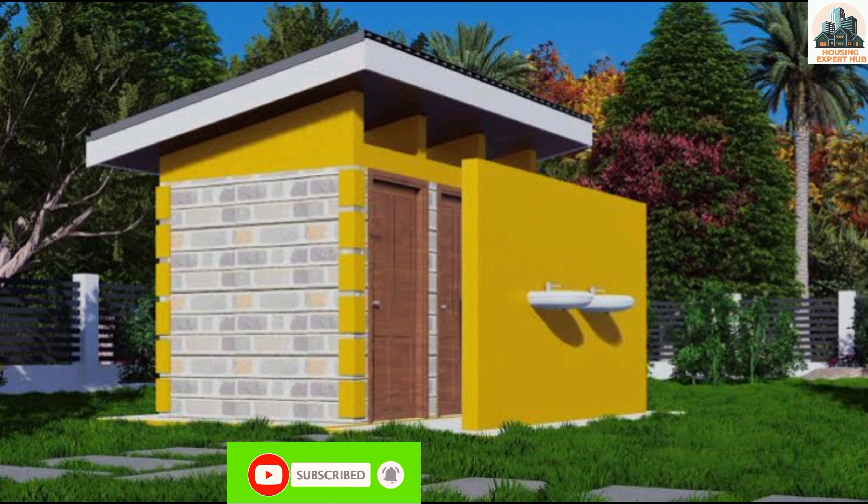Designing a two-pit latrine system and an associated bathroom requires careful planning to ensure hygiene, durability, and user comfort. This is a structured approach to designing such a facility, commonly used in off-grid or low-resource settings. Understanding the two-pit latrine system.

A two-pit latrine, also called a twin-pit latrine, is a low-cost, water-efficient sanitation solution where two alternating pits are used for waste decomposition. One pit is in use while the other undergoes decomposition. After 1 to 2 years, the decomposed waste can be safely removed, and the pits are swapped. Suitable for areas with high water tables, if properly lined, and no sewerage systems.

Key design considerations. A. Pit design dimensions. Each pit should be 1 to 1.5 m deep and 0.8 to 1 m wide, circular or rectangular. Lining: unlined pits for stable soil with low water tables; brick or mortar-lined pits for loose soil or high water tables. Vent pipe: a PVC vent pipe, 10 to 15 cm diameter, helps reduce odors and flies. Cover slab: reinforced concrete with a squat hole, 28 by 18 cm, and a tight-fitting lid.

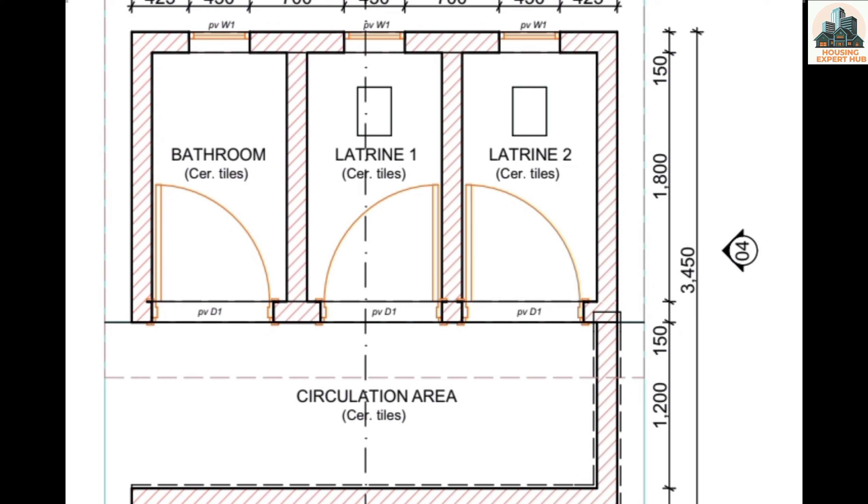Superstructure, bathroom toilet shelter. Materials: brick, concrete, or durable local materials. Size: at least 1.2 m x 1.5 m per toilet cabin. Roofing: corrugated metal, thatch, or concrete. Ventilation: openings near the roof or mesh-covered windows. Door: should open outward for safety and space efficiency. Hand washing station: a simple tap or jug system near the exit encourages hygiene. Use soap or ash for hand cleaning.

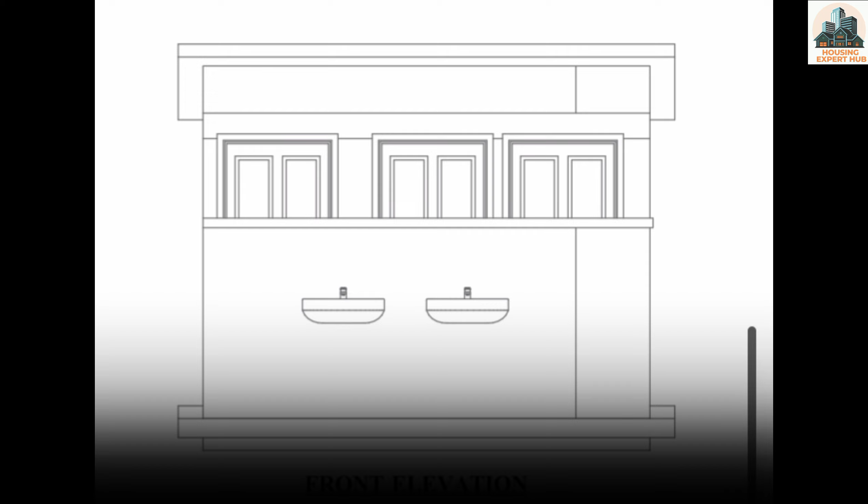Step-by-step construction. Site selection: at least 30 m from water sources, wells, rivers, on elevated ground to avoid flooding. Digging the pits: space pits 1 m apart to prevent collapse. Line with bricks or concrete if needed. Installing the cover slab: use reinforced concrete, 5 to 8 cm thick. Building the superstructure: provide privacy walls and a secure door. Include a vent pipe extending above the roof. Adding a hand washing facility: a simple bucket with a tap or a tippy tap.

Maintenance and safety. Alternate pits every 12 to 24 months. Remove decomposed waste safely; use gloves, compost if possible. Keep the area dry and clean to prevent flies. Educate users on proper use: no solid waste other than feces. Advantages of a two-pit latrine: low water usage, no flushing required. Cost-effective compared to septic tanks. Safe waste decomposition, pathogens die over time. Scalable for households or communal use.

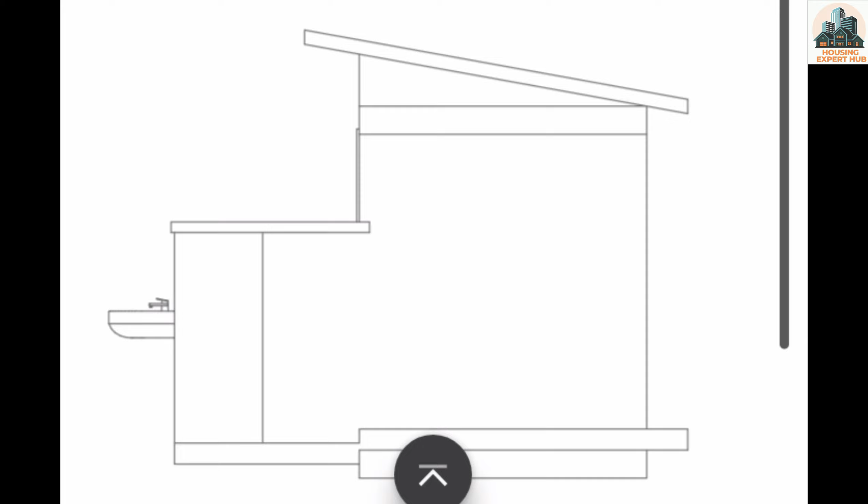Variations and upgrades. Pour flush latrine: uses a small amount of water to move waste into the pit. Ecosan, ecological sanitation: diverts urine for fertilizer use. VIP, ventilated improved pit: enhanced odor and fly control. Final recommendation for a functional and hygienic two-pit latrine bathroom: use durable materials for long-term use. Ensure proper ventilation to reduce smells. Train users on pit rotation and maintenance.

Building two-pit latrines with a bathroom requires careful planning to ensure hygiene, durability, and user comfort. 1. Site selection and preparation. Choose a location at least 30 meters away from water sources to prevent contamination. Ensure the ground is stable, well drained, and downhill from living areas. Maintain a safe distance, at least 6 m, from other structures.

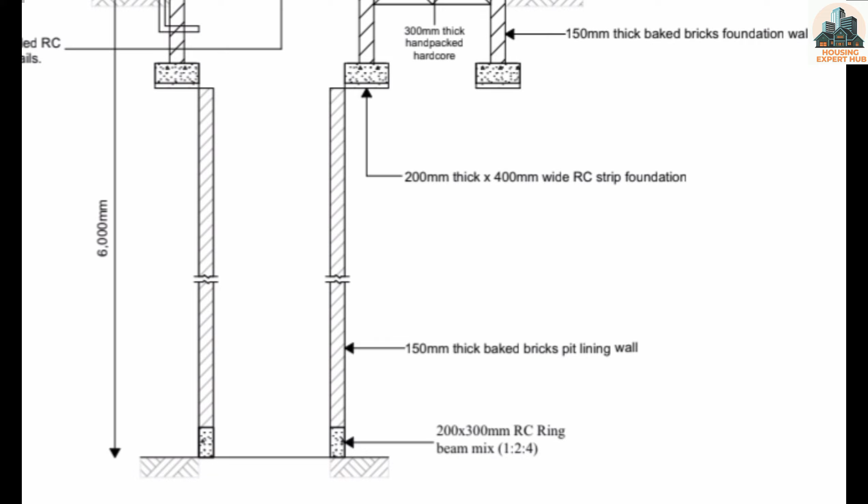Design and dimensions. Structure layout: two-pit latrines plus one bathroom can be a shared design or separate stalls. Recommended dimensions per unit: latrine stall 1.2 m x 1.2 m minimum. Bathroom stall 1.2 m x 1.5 m for bathing space. Total structure size 3 m x 2 m; adjust based on needs. Pit design for each latrine: depth 2 to 3 meters, depends on water table. Diameter 1 to 1.5 m. Circular or rectangular. Lining: brick, concrete rings, or stabilized soil to prevent collapse. Distance between pits at least 1 m apart to avoid structural weakening.

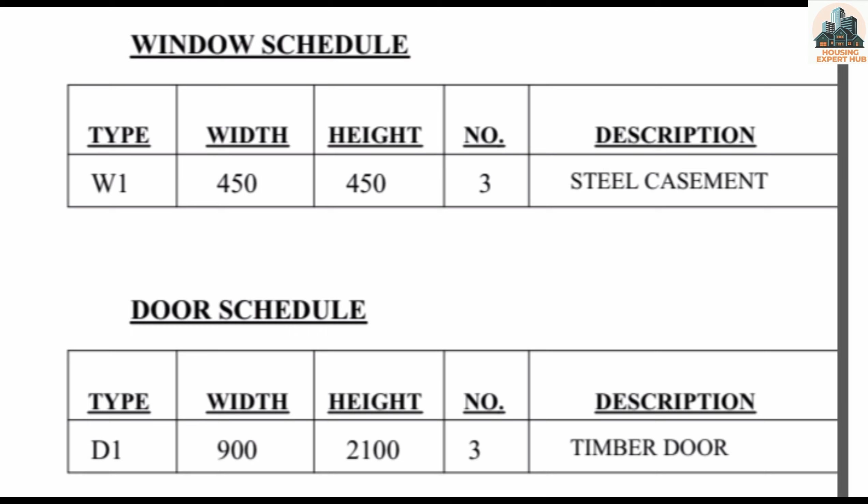Materials needed. Foundation: concrete, gravel, sand. Walls: bricks, blocks, wood, or metal sheets. Roof: corrugated iron, thatch, or concrete slab. Slab floor: reinforced concrete, with footrests for latrine. Pit lining: bricks, concrete rings, or mortar. Door: wooden or metal with ventilation gaps. Vent pipe: PVC pipe, 100 to 150 mm diameter, for odor control. 4. Construction steps.

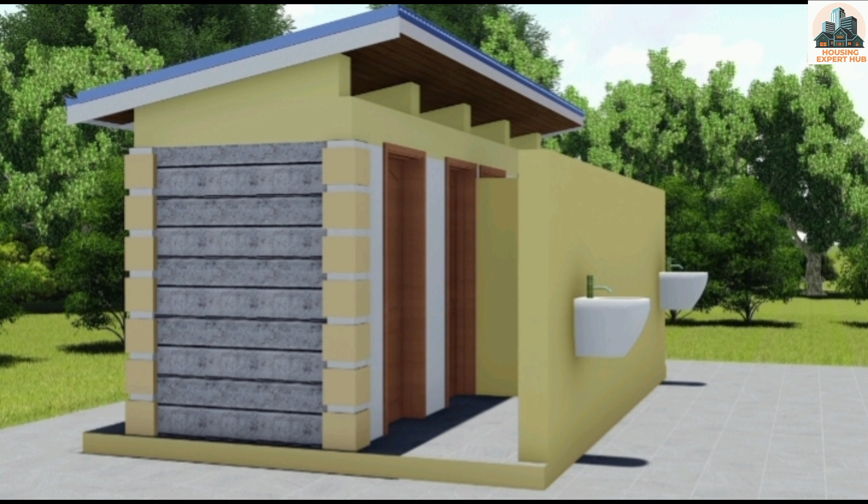A. Excavation and pit lining. Dig 2 pits, 2 to 3 m deep. Line pits with bricks or concrete. Leave gaps for leaching in one pit while the other is in use. Install a vent pipe connected to the pit to reduce smells. Slab construction: cast a reinforced concrete slab with a hole for squat pan or drop hole, 25 to 30 centimeters diameter. Footrests for squatting comfort. Smooth finish for easy cleaning. Superstructure, walls and roof: build walls, brick, wood, or metal, for privacy.